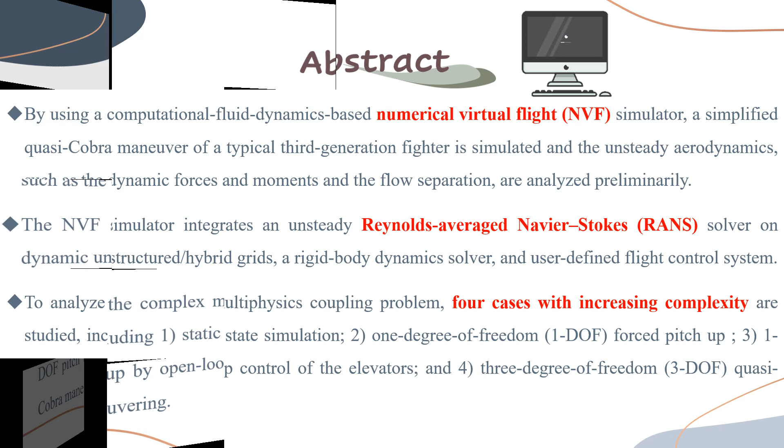This is the outline for this report. Introduction. Post-stall maneuvering has become a crucial factor in evaluating the performance of modern fighter aircraft. This type of maneuver involves complex, highly coupled multiphysics problems including aerodynamics, kinematics, flight control, and structural dynamics.

Traditional control design methods based on linear assumptions are inadequate for post-stall maneuvering, prompting the need for more accurate approaches that consider unsteady effects. In recent years, virtual flight testing in wind tunnels, numerical virtual flight simulation, and flight testing of model aircraft have been developed to tackle this challenge.

Among these methods, NVF simulation based on computational fluid dynamics and multiphysics coupling has gained prominence due to advancements in supercomputers and CFD algorithms. This particular study has utilized an NVF simulation tool called Hyper Platform for Engineering and Research of Flows Numerical Virtual Flight Simulator to investigate the aerodynamic characteristics and unsteady effects of a simplified quasi-cobra maneuver performed by a modern fighter aircraft.

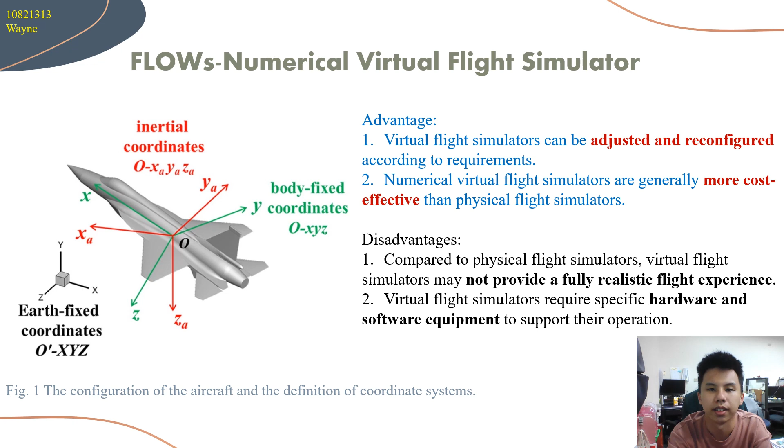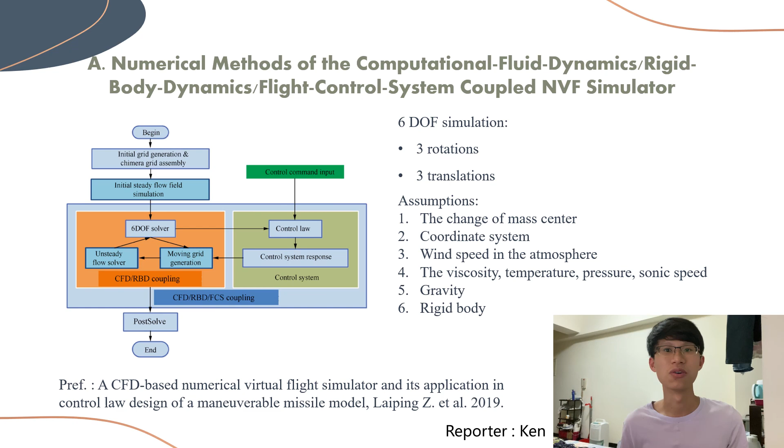And keep going. The data will be sent into the 6DOF solver with the input of control commands, which may be like the temperature or pressure or something. And after the CFD, RBD, FCS coupling, we will get the desired simulation data. It could be the pressure distribution of the object or the aerodynamic force.

And next is the computational model and the dynamic overset grid. Once we have the data, input the parameters and put the object data into the software, the simulation gets started. Sounds easy, right? But how does it work? So in some ways simulation always needs a lot of calculations. So on the other hand, it will take a lot of time.

So there are two types of grid generation. One is the structured grid. It has a higher generation rate and the data structure is simple. But in this case, our simulation object is a plane, and a plane is a very complex structure. So for the more complex object, the unstructured grid is more suitable than the structured grid. So using the unstructured grid can make the simulation data more precise.

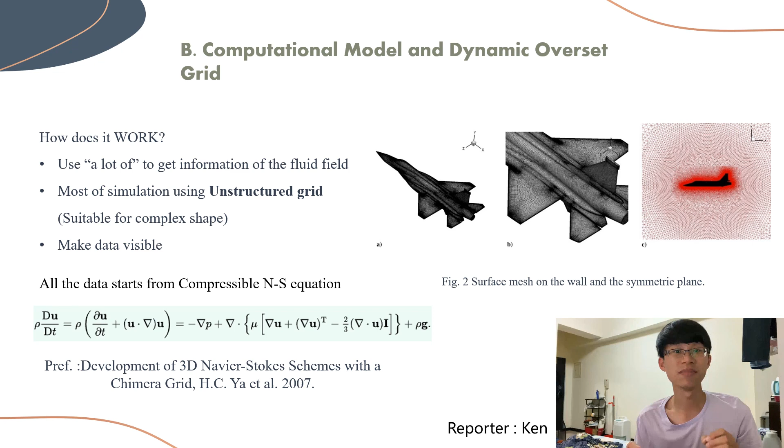A. Case 1: static state simulation. To determine the static aerodynamic characteristics of the aircraft, the paper first studied the static state at different angles of attack. In this case, the incoming flow conditions are Mach number 0.6, Reynolds number 1.9 × 10^7, angle of attack alpha 0 to 45 degrees, delta alpha 5 degrees, angle of sideslip beta 0 degrees, and elevator deflection angle delta E 0 degrees.

First of all, for static state simulation, a grid convergence study of the aircraft full-span model is carried out to determine the proper size of the grid. We consider three sets of grids with different grid densities. The detailed information is shown in Table 1. Steady RANS simulations are carried out on these three sets of grids.

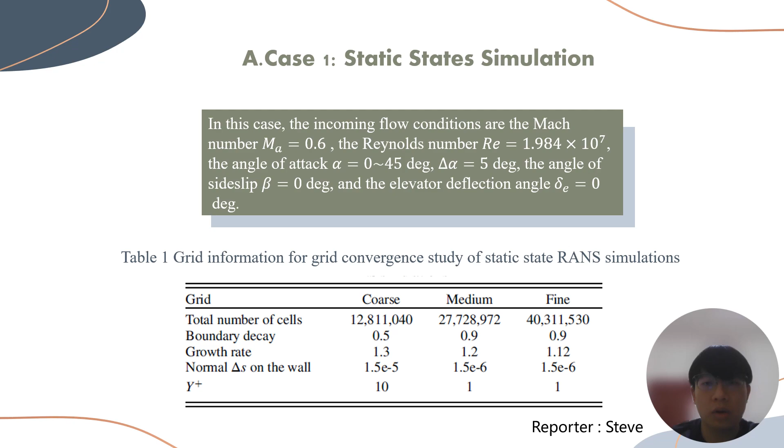Meanwhile, for the benchmark medium grid, the lift and drag coefficients agree well with experimental data, but there are some differences between the moment coefficients. The discrepancy issue of the moment coefficient was also encountered in previous studies. This may imply that

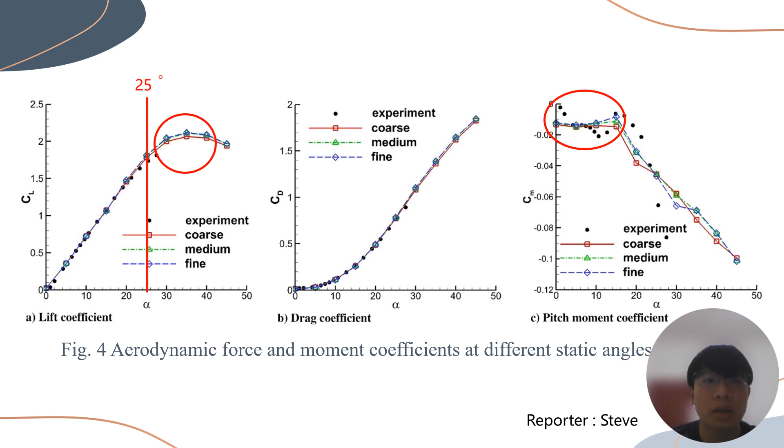For the pitch moment coefficient, the aircraft is stable since the moment coefficient is negative for a positive angle of attack. Also, a flat region can be found on the moment coefficient curve for alpha smaller than 15 degrees, which indicates that the coupling between the aircraft and its elevators is not obvious before this point, and therefore the control surface efficiency could be very high. When alpha is more than 15 degrees, the moment coefficient decreases almost linearly with the angle of attack.

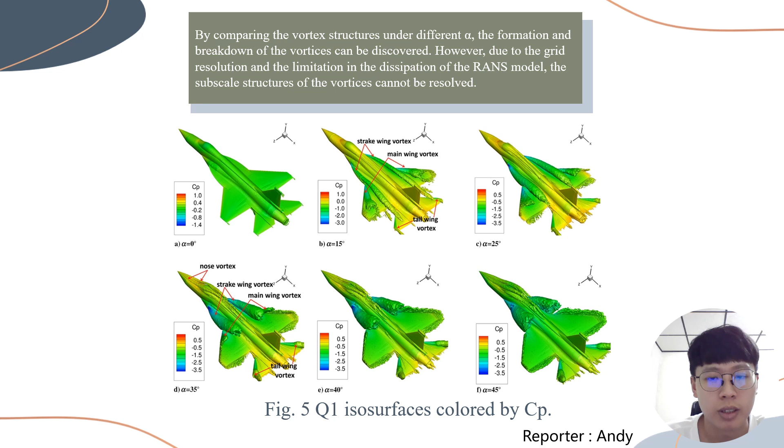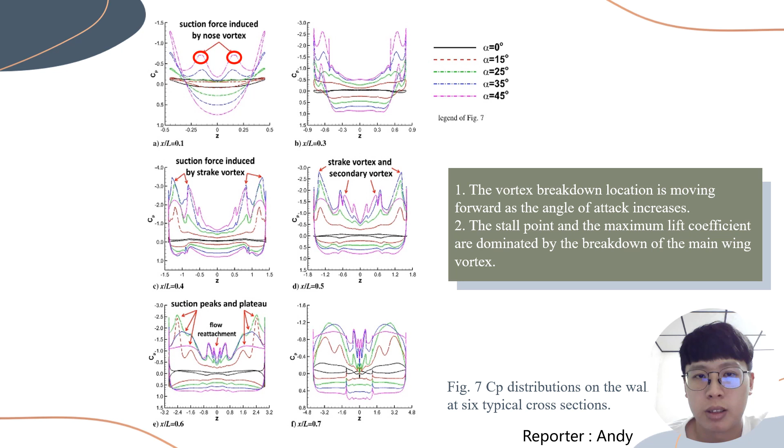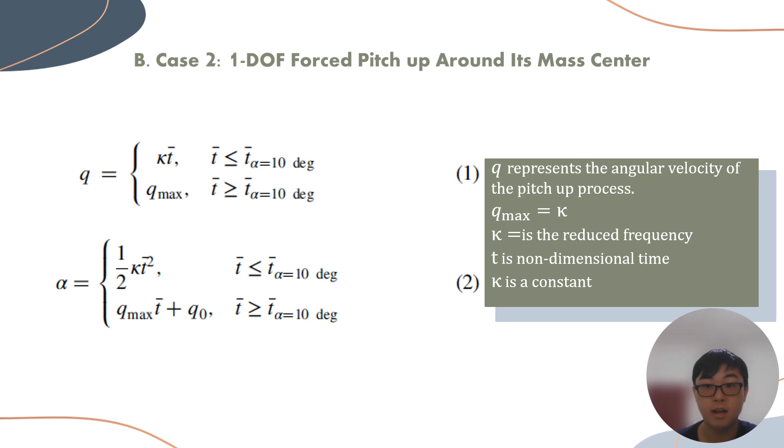My name is Jason. Pitch-up is a 1DOF pitch-up motion around the fighter's mass center. The grid is rotated with the aircraft as an entire rigid body in this case. The nonlinear pitch-up motion can be defined as follows. Table 2 shows we consider two reduced frequencies and 3 time step sizes.

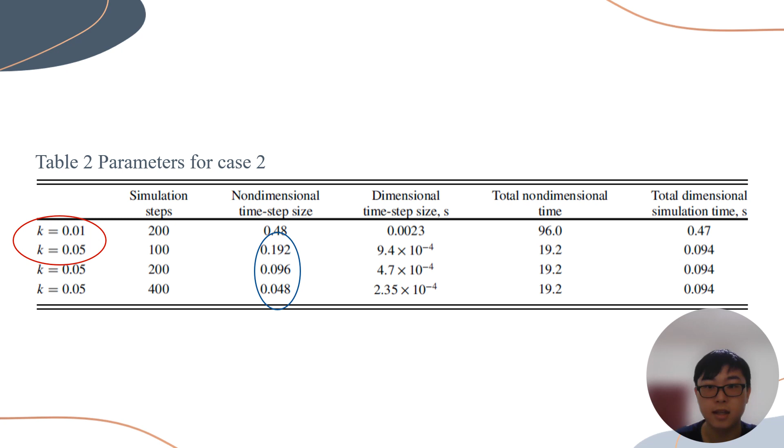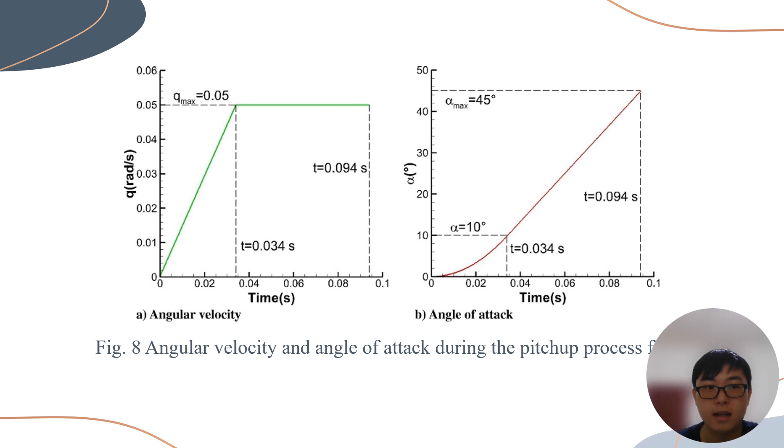Figure 8 shows the variation of angular velocity and the angle of attack with dimensional time for k equals 0.05. Figure 9 shows the comparison of aerodynamic force and moment coefficients for different time step sizes when k equals 0.05. The curves show very good agreement for the three chosen time step sizes. It seems that the unsteady numerical simulation results are not sensitive to the time step size.

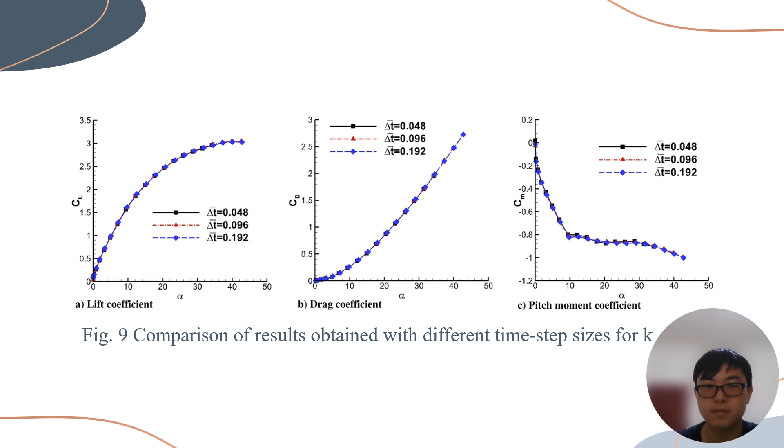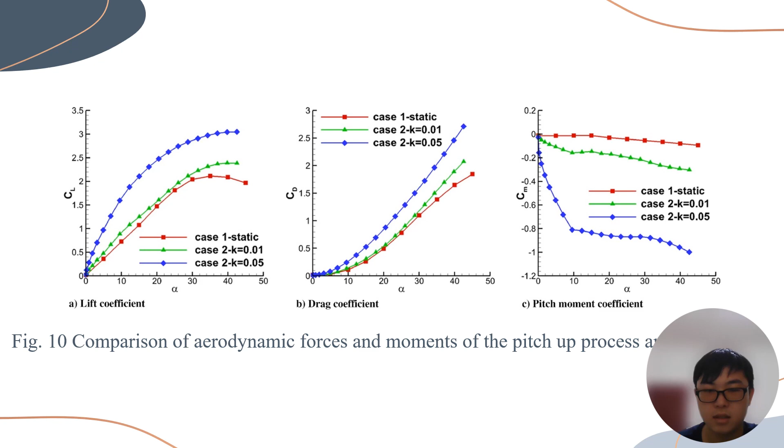Figure 10 shows the comparison of aerodynamic forces and moments of the pitch-up process and the steady state. The aerodynamic forces and moment are larger at the same angle of attack when the reduced frequency increases, especially at a higher reduced frequency.

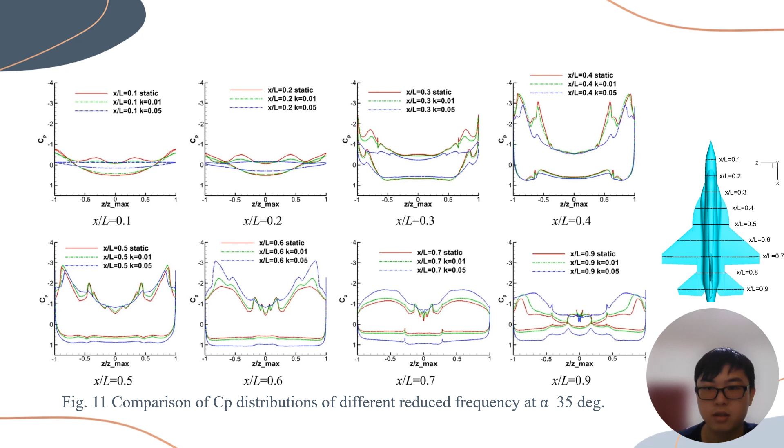Figure 11 shows the comparison of pressure coefficient distributions of steady state and the dynamic pitch-up at alpha equals 35 degrees for slices 0.1 to 0.5. The suction peaks on the leeward side are lower than those of steady state, and the windward surface pressure is smaller for dynamic pitch-up with the larger reduced frequency. For 0.6 to 0.9 slices located behind the rotation axis, the result is the opposite.

The reason for this phenomenon is that the effective angle of attack is changed due to the dynamic motion of the aircraft. As shown in Figure 12a, the effective angle of attack before the rotation axis is smaller than its actual angle of attack, which leads to smaller windward side pressure, smaller vortex strength, and a lower suction peak. By contrast, the effective angle of attack behind the rotation axis is larger than its actual angle of attack. As Figure 12b shows, this leads to the opposite result.

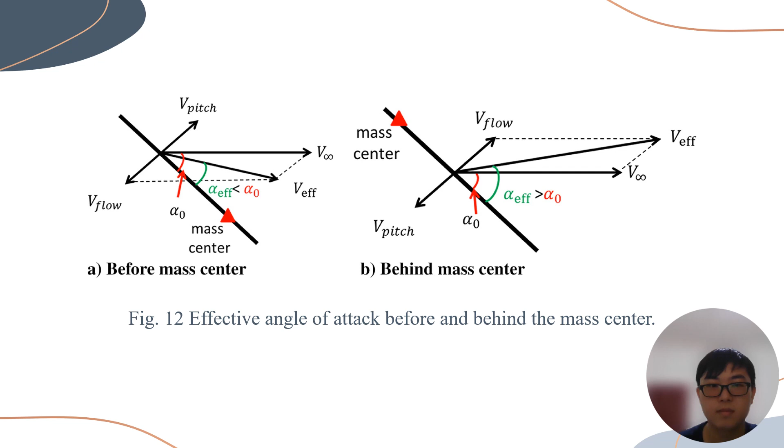In this slide, I will introduce case 3: one-DOF pitch-up by single-channel open-loop control of the elevators. In this section, the author designed a single-channel open-loop cosine function control law of the elevator, defined in equation 3. Delta is the deflection angle of the two elevators. K is the reduced frequency, which is set to be 0.05 in this section.

The control law is sketched in Figure 13, and the parameters are listed in Table 3. The author would like to simulate more physical time, so a relatively coarse time step is chosen in this case. The dimensional time step is 0.0031 seconds, which is very close to but still smaller than the reference time. The maximum elevator deflection angle delta max is 15 degrees at 0.31 seconds and remains constant afterward.

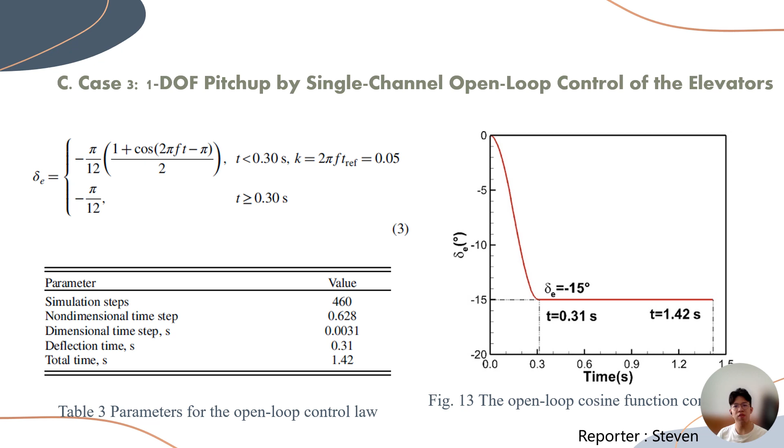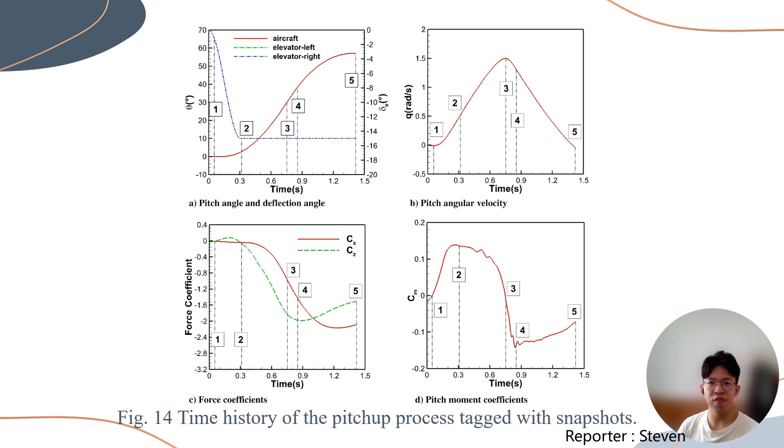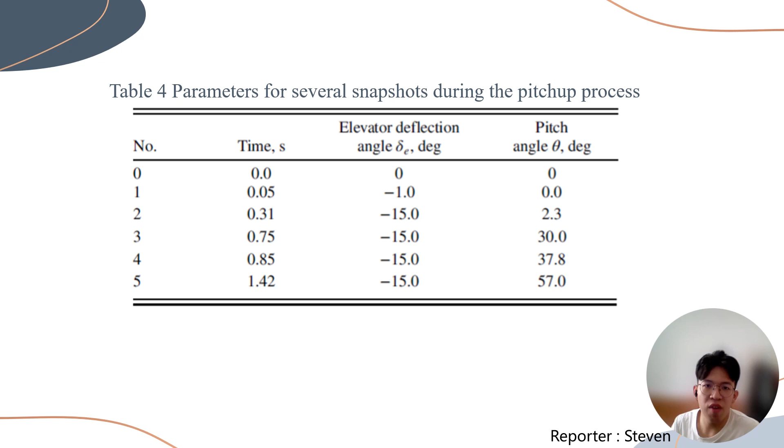In this slide, I will introduce Figure 14. As you can see, it shows the time history of the open-loop control pitch-up process, and the pitch angle theta is equal to the angle of attack alpha. To analyze the process more carefully, Table 4 lists 5 typical snapshots during the pitch-up process. It contains snapshots that illustrate the behavior of the aircraft at different times during the simulation.

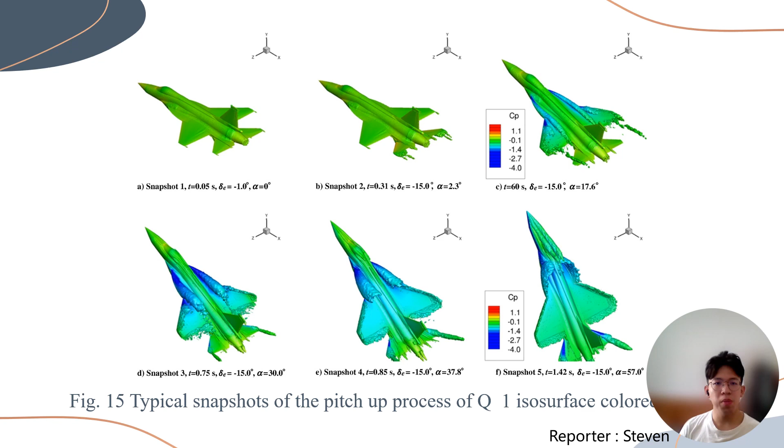In this slide, I will introduce Figure 15. This figure shows the Q equals 1 isosurface contour of typical snapshots, which demonstrate the generation and the breakdown of the strake wing vortex, the main wing vortex sheet, and the wingtip vortex with the pitch angle increasing.

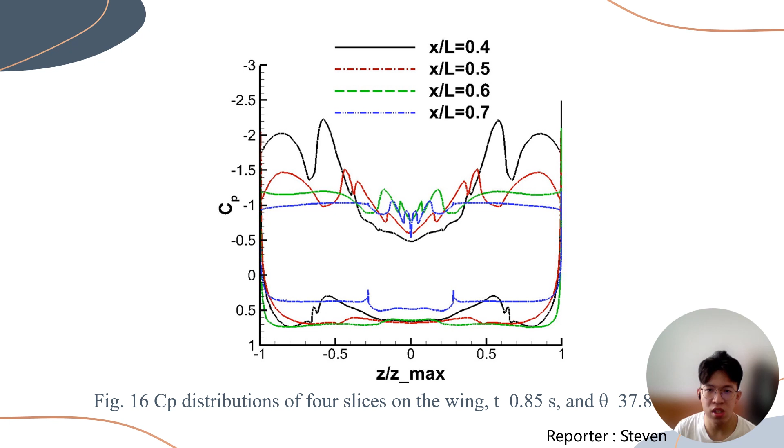In this slide, I will introduce Figure 16. It shows the pressure coefficient on the wings at time equal to 0.85 seconds. It illustrates that the suction peak decreases at the slice x divided by L equal to 0.4 and becomes flat at x divided by L equal to 0.6, which indicates the vortex broke down on the main wing and lift stall around this pitch angle.

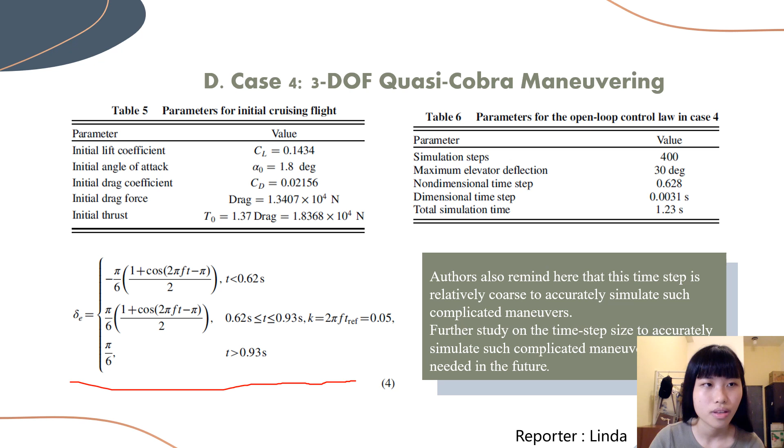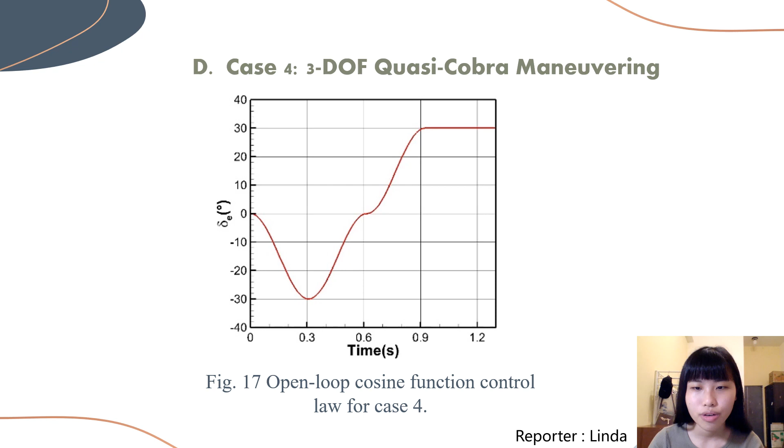And then they design a cosine function open-loop controller as shown here, and the controller is sketched in Figure 17. The open-loop cosine function controller is enough to make sure the aircraft accomplishes the expected maneuver. The authors introduced two types of simple thrust model, including a constant thrust model and a vector thrust model, which changes the direction and the magnitude of the thrust at 0.93 seconds.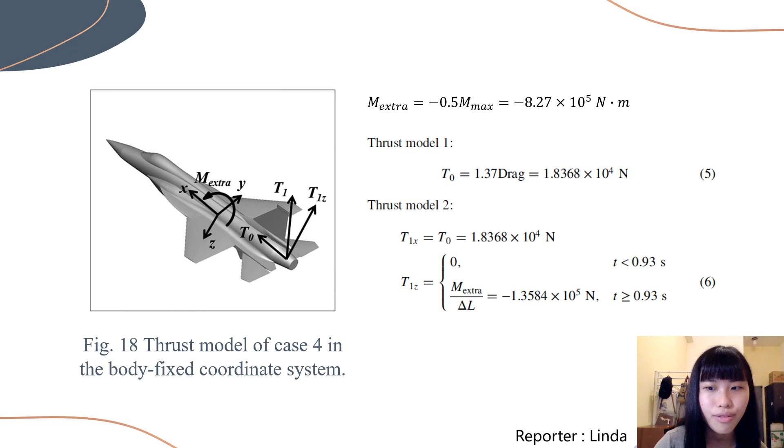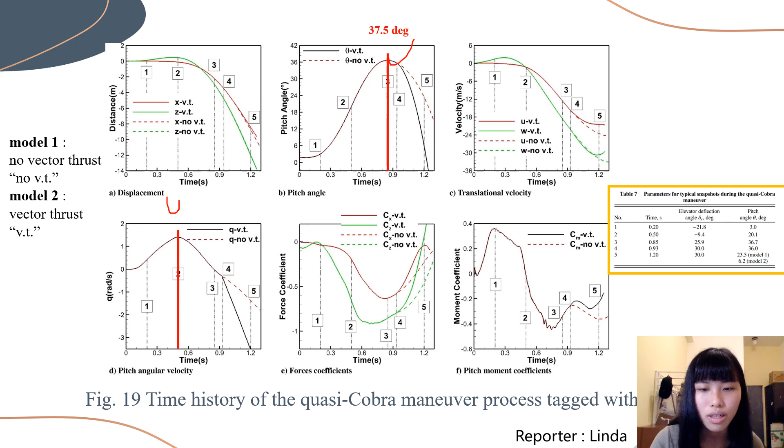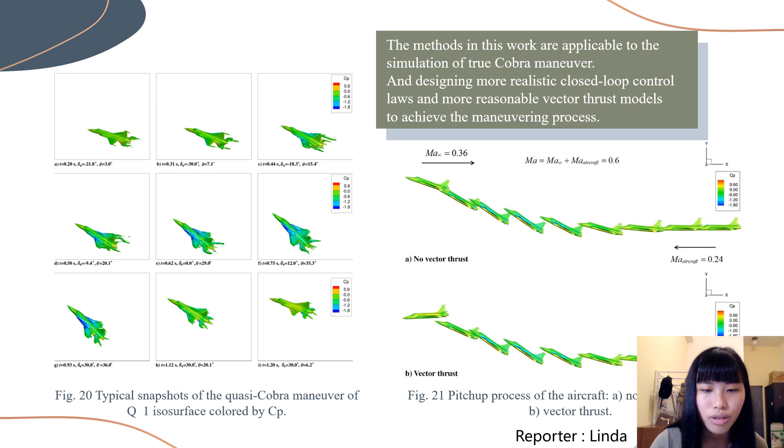Figure 20 shows the Q equals 1 isosurface contour of 9 typical snapshots of thrust Model 2. Figure 21 shows the trajectories. The total relative velocity between the aircraft and the free stream is Mach number 0.6, so the aircraft will move forward in the x direction. The methods in this work are applicable to the simulation of a true Cobra maneuver.

In conclusion, to study the post-stall maneuverability of the fighter numerically, the quasi-cobra maneuver of a modern aircraft is simulated using an NVF simulator. Through the simulation, the static aerodynamic characteristics of the aircraft are obtained, and the understanding of the mechanism of high lift at a large angle of attack is deepened. By applying an appropriate deflection command to the elevator through an open-loop flight control law, the fighter can pitch up to a high angle of attack from the cruising state, and then pitch down quickly. Although the maximum pitch angle is much smaller than 90 degrees, the maneuvering process is similar to the Cobra maneuver.

Even though the RANS simulations in the paper are not necessarily highly accurate, the preliminary application in this work demonstrates the potential of the NVF simulator for the simulation of realistic post-stall maneuvers, which is very useful for modern fighter design. NVF results also need to be validated with wind tunnel experiments and model flight testing.